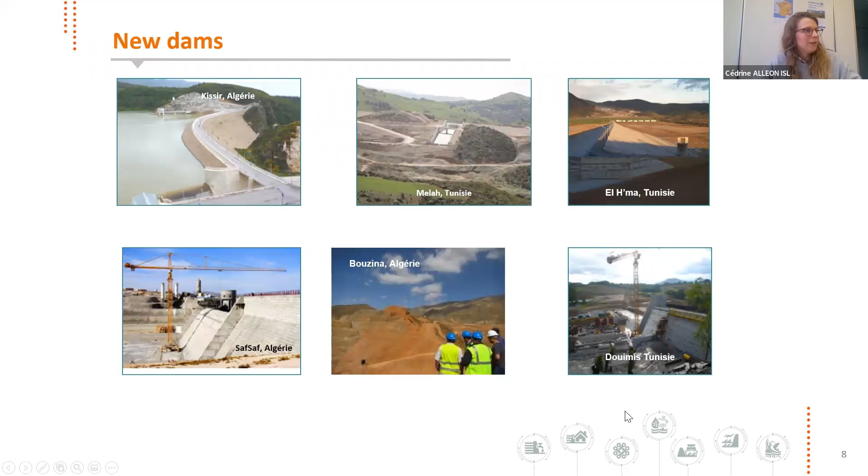A few pictures for you to get an overview of our topics. Some dams built under ISL supervision, mostly in Africa, and some dam rehabilitations - one here in France, the others in Africa as well. So a very different kind of dams.

This is hydropower topics - all things we're very proud of, but in Lille we mostly work on navigation structures, locks and canals, and you're aware of the canals in North Europe. That work is ongoing right now, and we are pretty busy with this topic.

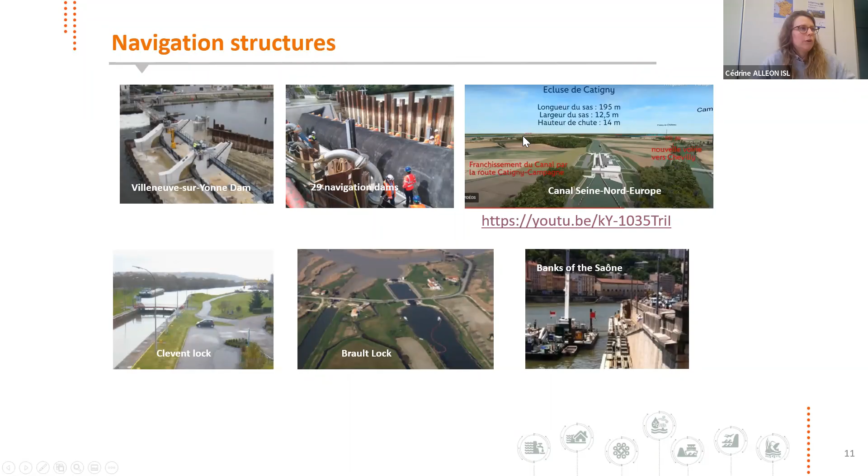I'll leave you the slide, and you can also check the YouTube link where you can see a BIM model of the canal and what we can do with BIM modeling, showing the structures and their environment very nicely.

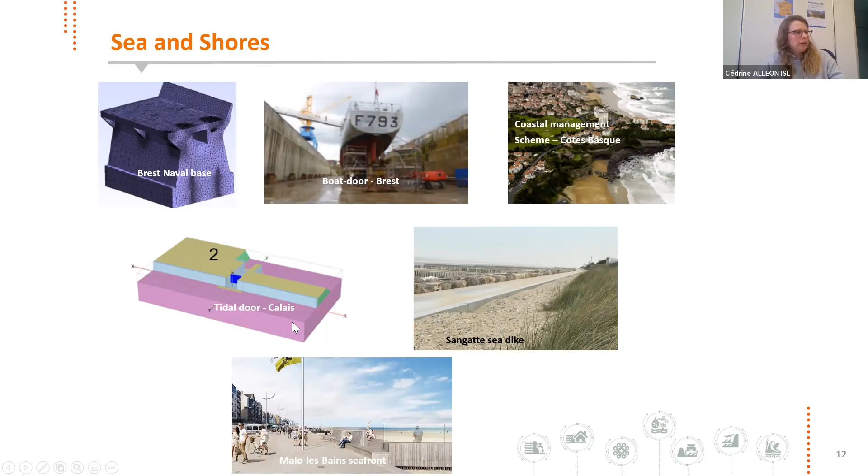We also work on sea and shore structures - sea and shore management programs, but also rehabilitation of structures and building new ones. I'll speak a bit more about this Calais door afterwards. We've been involved in innovation from the beginning and try to continue this, spending some income on it.

It has been started with Michel, with the L from ISL, and is involved in a lot of international groups, working groups, mostly the ICOLD and the French COLD. Also, Luc, who is our current president, is involved in a lot of technical working groups, and that allows us to be aware of what's going on and to improve our way of designing and our technical level.

I'll let the floor to Nicolas to go to a transition to DigueELITE projects. Thank you, Cédrine. So as you said, ISL has long been involved in R&D projects alone or with partners. It's always in its core business, so in dams and hydraulic works, including levees. Sometimes we do some efforts alone, but we like to work with partners also, with or without external funding.

Since 2009, we put efforts on levee and dam erosion processes, and it started in 2009 with a French large-scale research program on internal erosion. The idea there was to better understand the internal erosion process, but also to provide operational methods for engineers to assess the risk of internal erosion and to design levees and dams accordingly. And afterwards, we went to the next project.

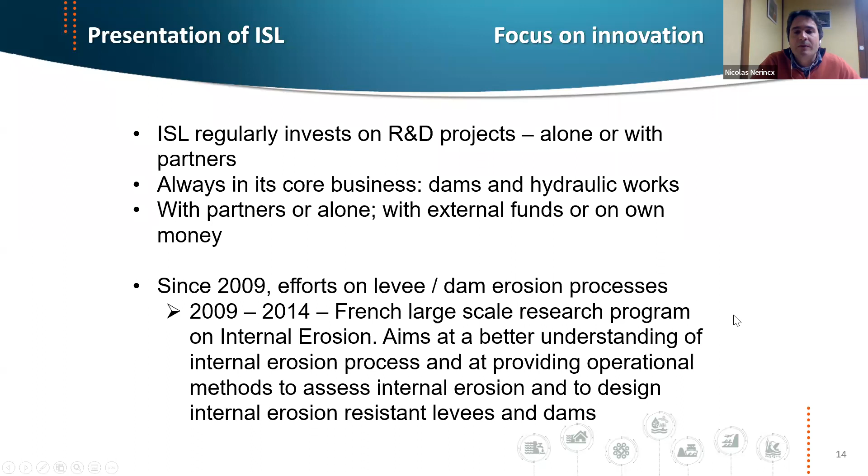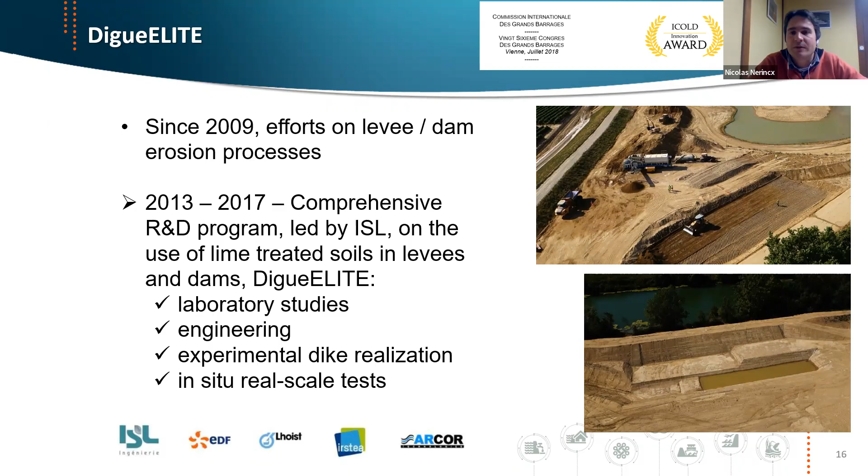This is the DigueELITE project. DigueELITE focuses more on external erosion. This program started in 2013, and it's a comprehensive R&D program led by ISL on the use of lime-treated soils in levees and dams. We had laboratory studies, engineering, we made an experimental dike, and we performed in situ real scale tests. You see the partners below, and some pictures of the test site.

Here's a small video, I hope it will work. You can maybe go on sound. Sorry, the sound lower. Lower, lower, sorry.

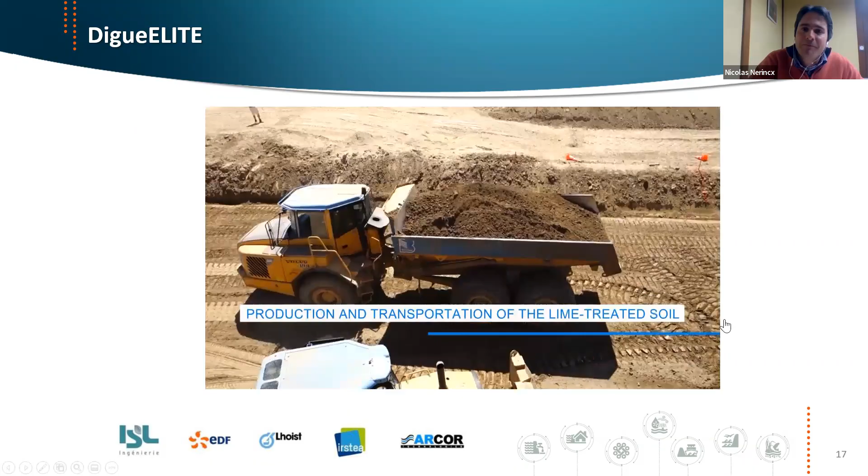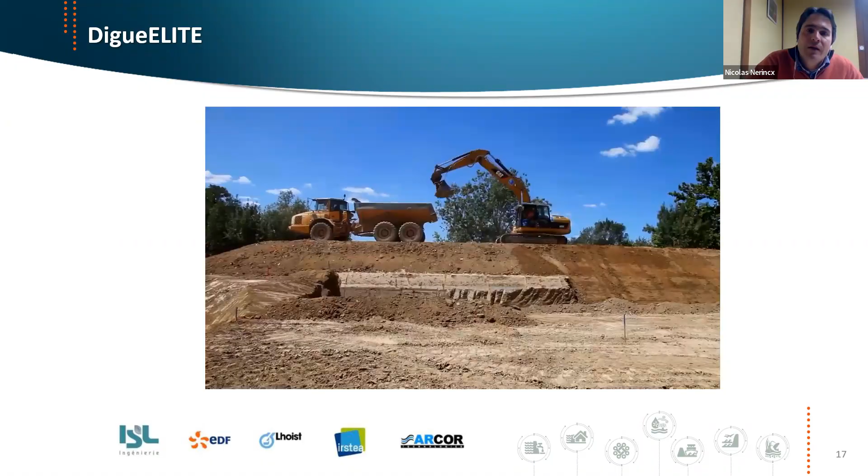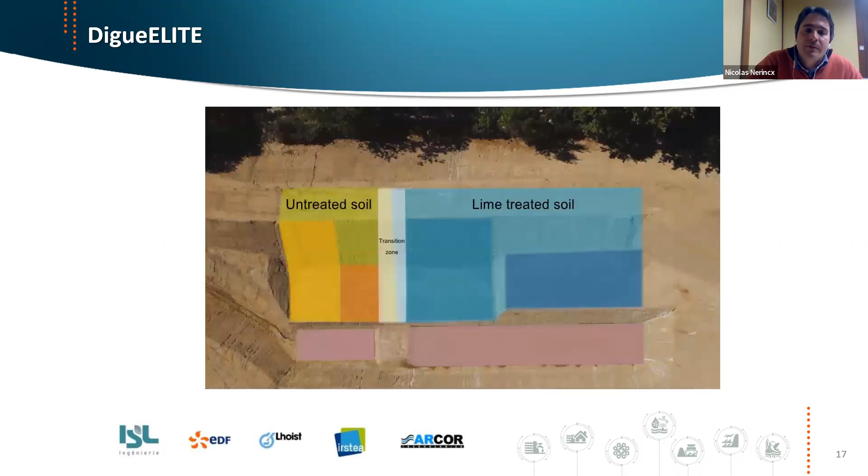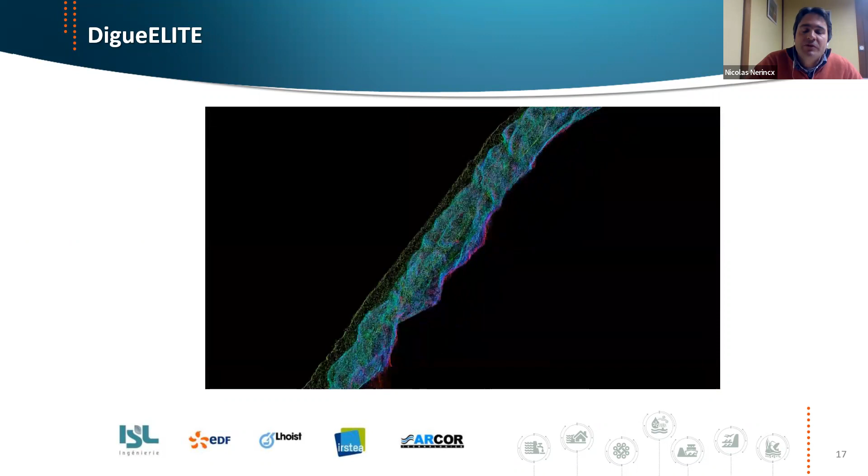So there you see the realization. We put a lot of attention into how we can really make the dike, with what kind of material, what kind of control, and so on, so we can have a very high performance dike in lime-treated soil. We had a stretch with lime-treated soil and a stretch with untreated soil to allow us some comparison. We did overflow experiments on about a 60 centimeter wide channel with some velocity measurements, erosion depth measurement as well, manual, and with the 3D laser scanner. So we could have very interesting results that I will comment on in the next slide.

Please continue with this one. No, that's okay, that's okay. What was your request? No, that's okay. You want to continue? That's okay, that's okay, I will continue.

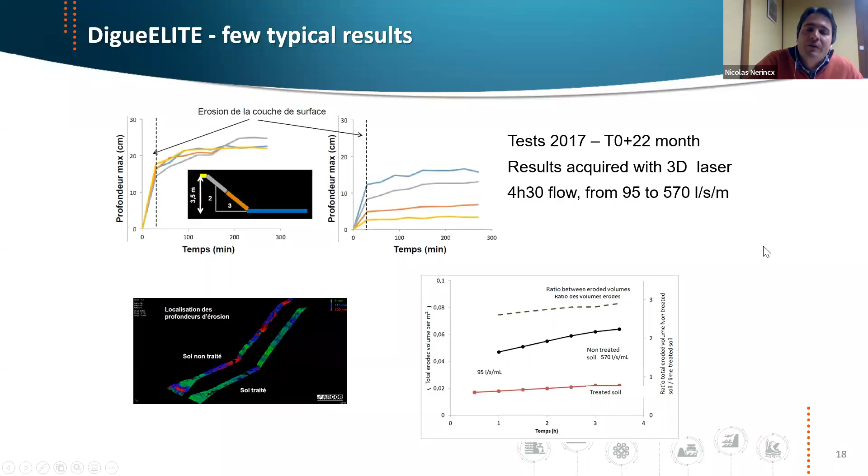Thank you. So here are a few typical results of the overflow experiments. Thanks to the 3D laser scanner, we had a very accurate profile of the dike before the experiment, after each step of the experiment, and we could compare also with treated and non-treated soil. We could come up with very precise erosion volumes eroded and ratios and so on to compare how the non-treated and the treated soil are eroded.

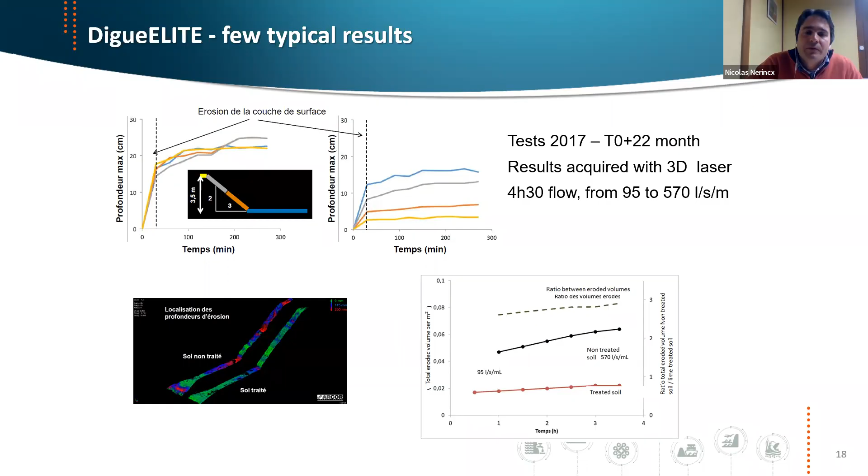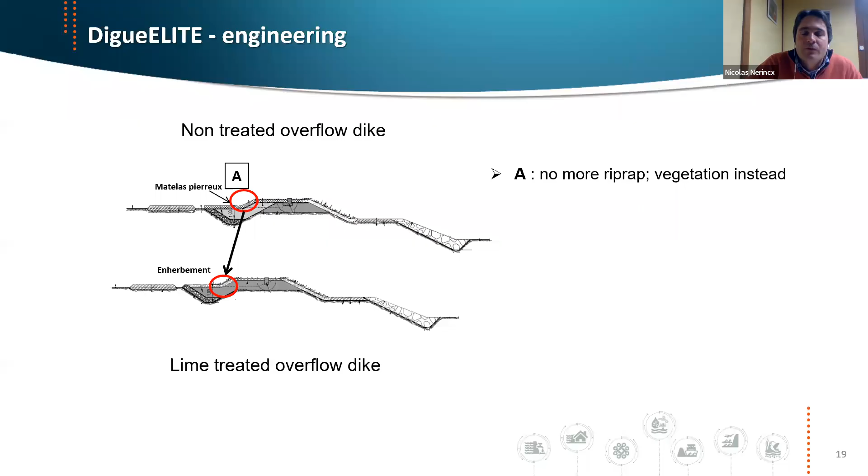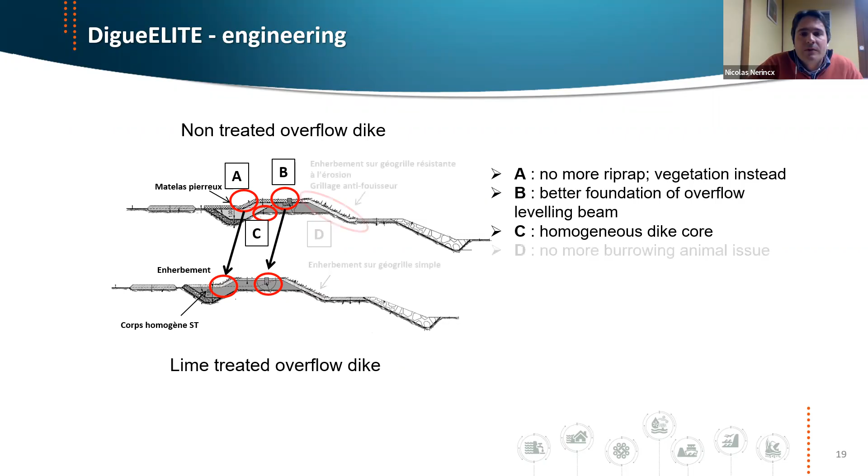We processed all this information, and we could come up with design recommendations and optimizations thanks to lime treated soil. For example, how you can protect the inland or the riverside, how you can deal with the beam that is defining your overflow level, for example if you have a spillway, how you can deal with the materials to be resistant against internal erosion, and also we had very interesting insights about how lime treated soil behaves with burrowing animals. And so we came up with cost estimates also for these two designs.

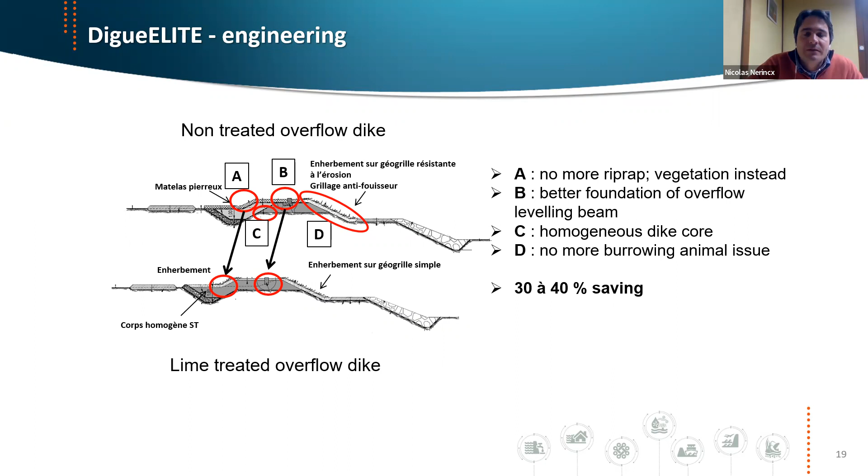It was very interesting for us to go from this DigueELITE project to the Polder2C project, because the context is more or less similar, meaning that we have a play field to do some large scale tests, but the scope is much larger in Polder2C. We have more funding, more possibilities to do more experiments. What is very important is that we now have this international collaboration and sharing of experience, because our first project was only a French project. It includes new topics, so again, a wider scope. It's a very good match with the ISL strategy with respect to R&D in its core business, so that's why we are very happy to collaborate in this project.

Thank you, Nicolas. I will take back the floor for the last few minutes and show you a very different project, which is one of our case studies currently, more specifically related to a structure that is already existing, which we are repairing in the sea coastal area.

I will give you a brief overview of the French regulation regarding dikes, because it changed in 2015. What's interesting is that before, we used to consider each dike individually and set up regulation for each one. On the same river, part of the dike could be managed by a city with little income and poor protection for people there, while downstream another part of the same dike could be managed by a city with much more means and better protection.

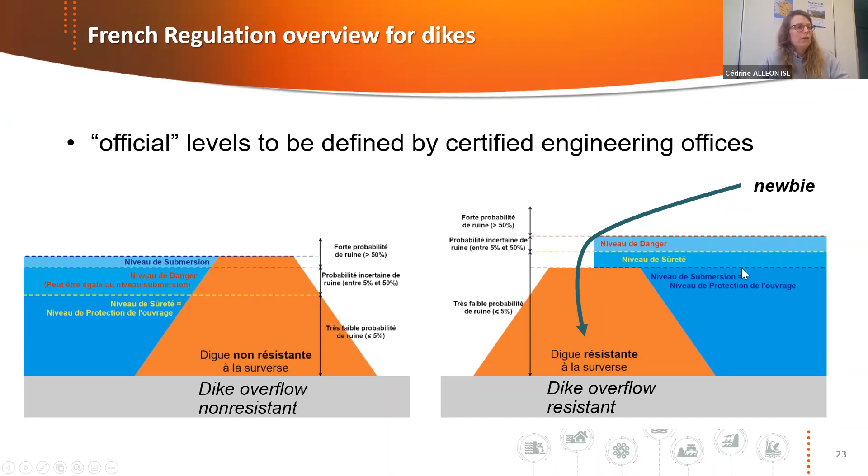More recently, French regulation added dikes that are resistant to overflow, which didn't exist before. This means a new way of thinking: dikes may be able to resist overflow, so the official level can be higher, because you consider that when flow goes over it, it's not ready to breach very soon.

Not in detail, but the difference since 2015 in the duties for waterboards is that, for a start, you have to have a permit for your diking system, and the permit depends on the persons you are protecting in the protected area. Then you have a rating of your diking system—before it was per dike, now it's for the full diking system.

You consider inhabitants living in the protected area, but also people working there. You have a lot of duties, like in-depth inspection visits at different frequencies and monitoring reports, all depending on the number of persons protected by the diking system.

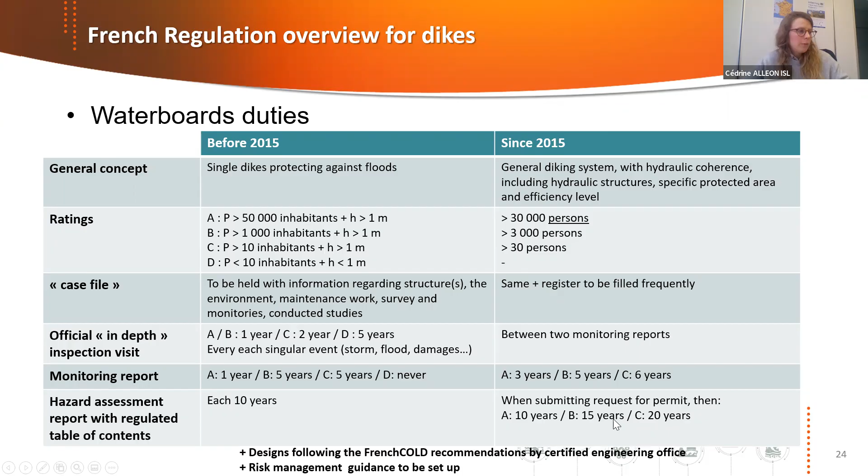Also interesting for you: we have to design the structure following the recommendations of the FrenchCOLD, but the managers of the diking system also need to set up a risk management guidance handbook. We are working with Bart and Marianne to share experience on setting up this kind of risk management and emergency response handbook.

So more specifically, I talked about the regulation, and now you'll understand why. For the project I'm sharing with you, we are in the northern part of France, in a town you may know, Calais, which is linked to England—well known for its tunnel.

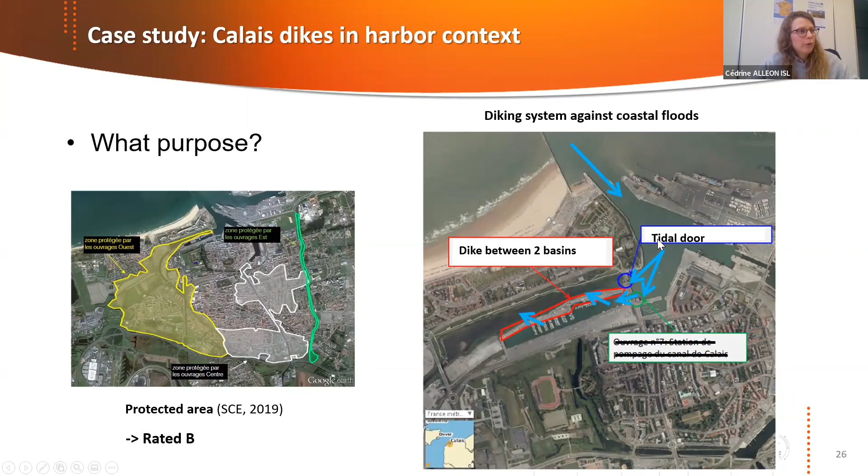Here, the population protected by the structure in the harbor has been calculated, and there are quite a lot of people there. The diking system that was allowed is rated B in the classes I showed you before, and it includes two parts: a dike separating the marina and the basin, and a tidal door. These two parts are connected, and they protect people from floods coming from the sea.

Here you see an overview of the area. The marina, the harbor, is on the top part of the picture, and then you see this storage basin that keeps the water while the door is closed. What's happening is that the door is closed at high tide, so the water coming from the continent is stored temporarily in this storage basin. When it's low tide, the door opens and provides the opportunity to lower the water level in the river.

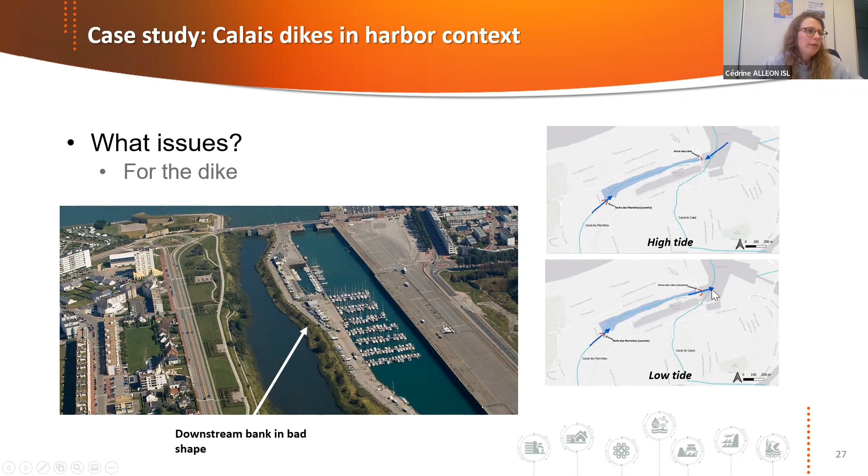But you see the slope here is in a very bad shape, so it needs to be repaired, mainly due to the high velocity that you can meet in the basin when the door is open.

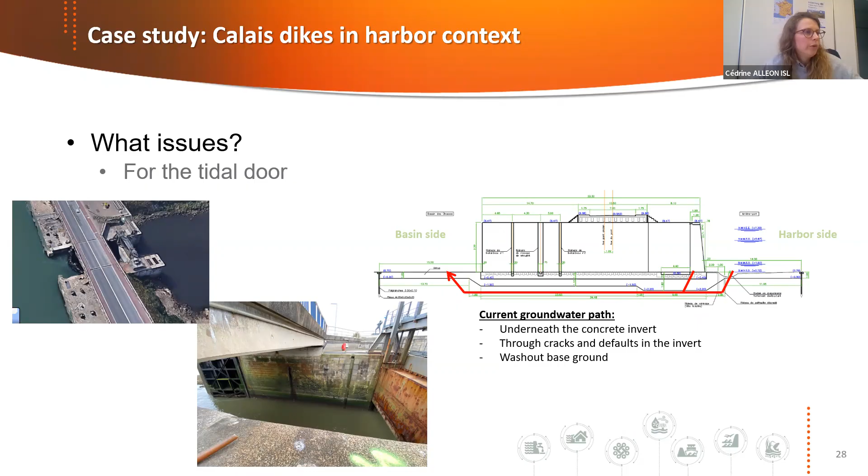The door has different issues. Mostly it's that the invert under the door has two parts: the door is here, and then you have a safety mask behind it. So here is the basin, and on the right side of the first picture there is the harbor. Since the invert is in very bad shape, the groundwater flow is going under the invert and washing out the base ground, and then the door is submitted to internal erosion issues under the ground.

So we did some calculations to provide repair measures for this structure. For the dike, it's quite easy: we have to soften the slope to increase the safety coefficient of the structure and to provide some protection, since there is high velocity in the river or basin part.

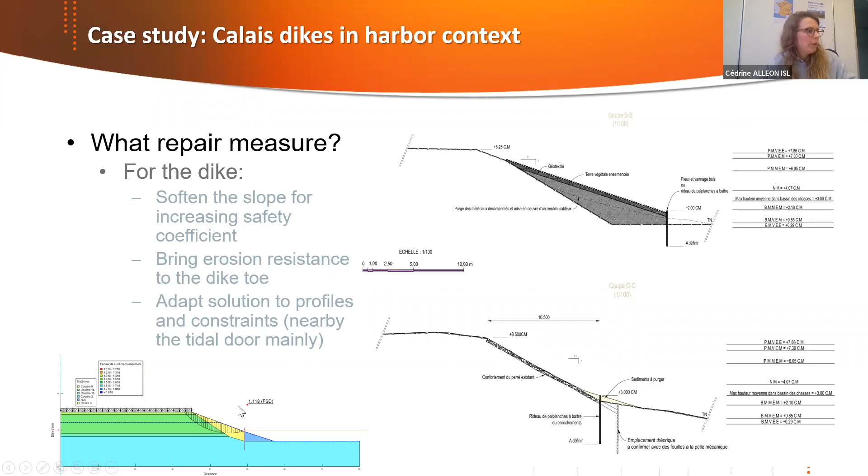But we have some issues near the door because the area is not so big, so we cannot soften the slope there. We have to repair the existing slope with grouting behind the existing protection, and repair the door as well. We did some numerical calculations for this.

For the door, it's a bit more complicated. So we set up a 3D model of the door with the ground parameters that allow us to see first the hydraulic flow under the door, and also the mechanical behavior of the door itself and the ground around it. The solution for this issue is to set sheet piling on the harbor side under the door, in the invert of the door. This allows us to increase the groundwater flow path under the invert and reduce the risk of internal erosion. These are part of the drawings we made to design the solution.

So now we are finalizing the project design, and we will go through an environmental study as well to finish the project itself, and finally we will start the tendering process and follow up on the construction site. This is quite a regular project we worked on, with some specific technical issues that are very interesting. What is interesting here is that we have to provide solutions for these two structures that are protecting people from floods coming from the sea, but also protecting people's ability to release water coming from the polders behind, out to the sea.

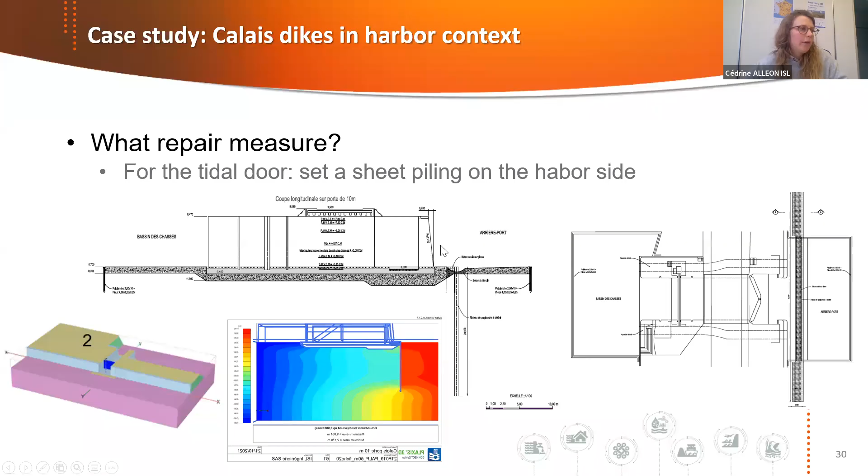So, due to climate change impact, the performance of the systems needs to be as high as possible, and needs to increase a bit. And that's it.

I hope it was fast enough, so it's not too late.

No, very interesting presentation. Your organization is working much broader than I thought, and especially your example of the harbor is really interesting. In fact, we needed much more time for it than we had, but my congratulations to you and Nicolas for this good performance, I think. Thank you. Anyone...